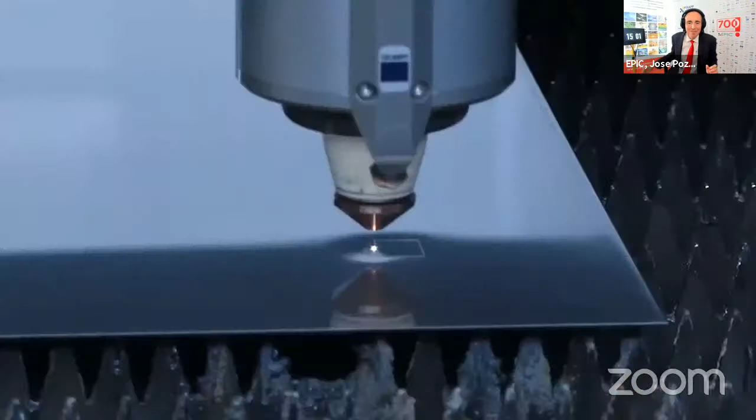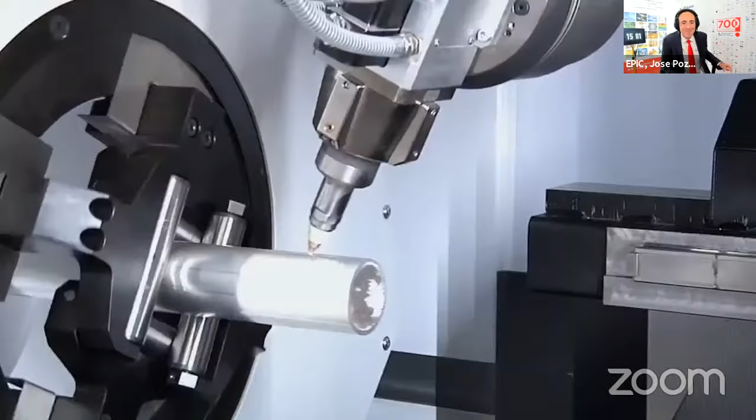Let's start with one of the biggest application fields, industrial manufacturing. Mid-infrared has already made a big impact in the laser-based industrial manufacturing world. CO2 lasers are a mature technology that is already very well established. Companies like Coherent, Prima Power, or Trumpf are very well known and trusted brands. Yet, there are still challenges related to beam shaping and beam delivering. Let's discover those needs and match them with solutions offered by the Mid-IR Alliance.

Think about input from specialty optical fiber companies like Le Verre Fluoré, CorActive, or Art Photonics, to the mid-IR optics of Iridian or LightPath, or the beam shaping capabilities of K-Labs, just to mention a few.

But what if we go beyond CO2 lasers? What makes me extremely excited is the launch of a new generation of mid-IR ultra-fast lasers, down to femtoseconds, to be used in industrial manufacturing. Look at the examples from newcomer Femtum. Why am I so excited?

Because when it comes to consumer products like the phone in your pocket, it is all about thin film patterning. It turns out that mid-IR pulse lasers are ideal for thin film patterning. That's because most conductive thin films are based on oxide materials that strongly absorb 3 micrometer wavelengths. That means mid-infrared is ideal to selectively remove these thin layers without affecting the substrate.

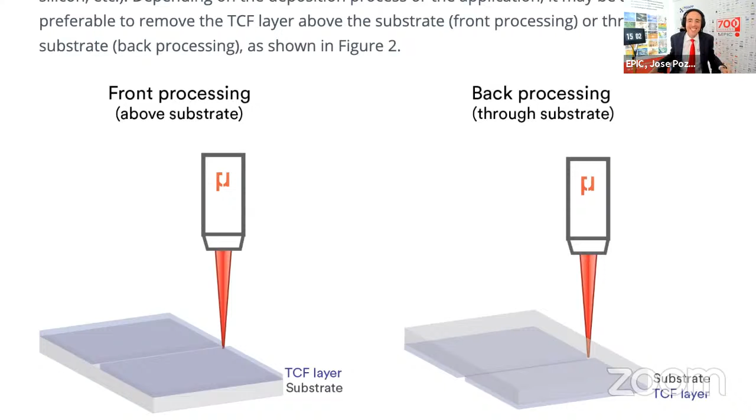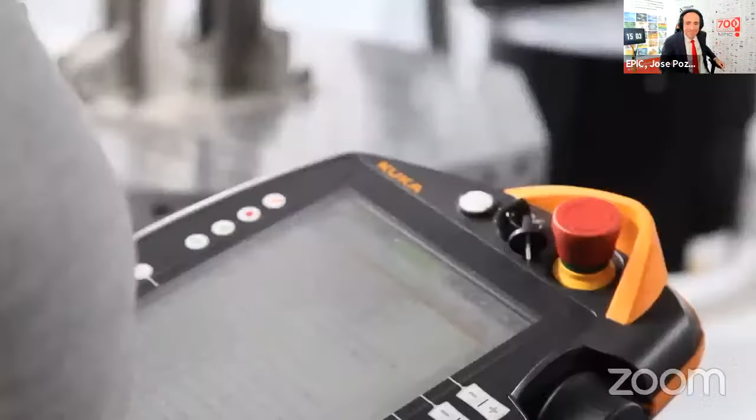But another crucial aspect in industrial manufacturing lies in real-time monitoring, because recalling a product these days can cost millions. For example, during a laser welding process, any changes to the process parameters will affect the size and properties of a welded joint. Constant monitoring is essential, and there are many ways of monitoring that with thermal cameras.

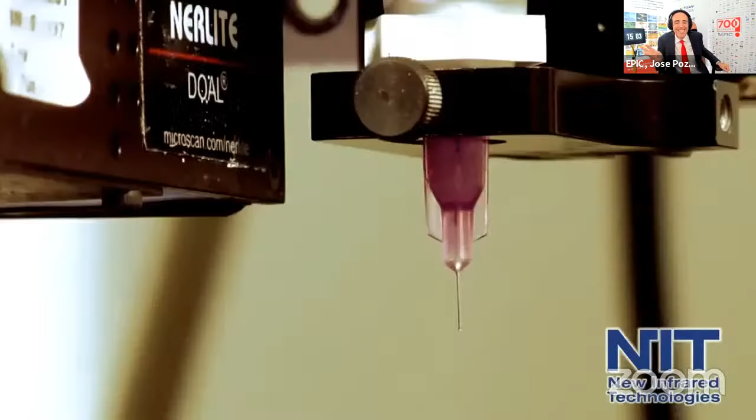What is the best wavelength range for such monitoring? Is it short wave, medium wave, or long wave infrared? The Mid-Infrared Alliance can count on top companies in this segment, like Xenics, New Imaging Technologies, HiSpecs, IRnova, or New Infrared Technologies.

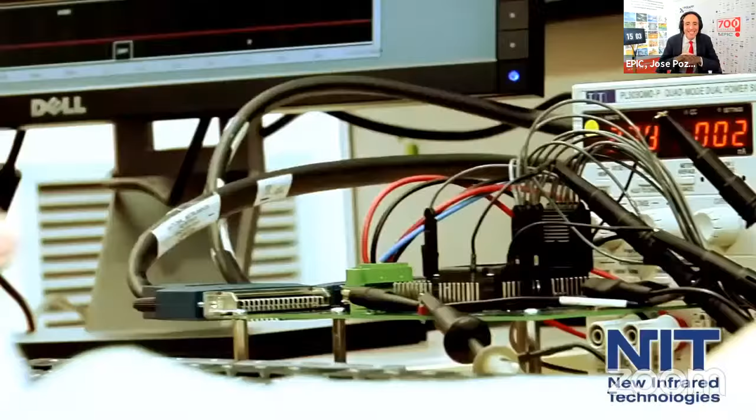And last but not least, real-time gas analysis also plays an important role for detecting unwanted vapors or even flammable compounds leaking onto the factory floor. Spectroscopy is the solution. I'm thinking of supercontinuum lasers from companies like NKT Photonics or Leukos, and quantum cascade lasers from companies like Nanoplus, Mirsense, AlpesLasers, or Quantum. If you match them with the mid-IR detectors from Vigo System, Ineria, or NLIR, you have a recipe for success.

So do you manufacture mid-IR optics, filters, lasers, detectors, or cameras? Perhaps you integrate them into industrial manufacturing systems? Or do you want an independent reality check from end users? If so, then the Mid-IR Alliance is here for you.

So if you are not on holidays on July 14th, or even if you are, take a break at 3 p.m. and join a great discussion. I promise you, it will be worth it. Magical things happen when we are tuned to the same wavelength, mid-infrared.

Indeed, magical things happen when we are tuned to mid-infrared. Thank you very much. I see we are all here, Le Verre Fluoré, Nanoplus, NLIR, NIT, HiSpecs. I tried to mention as many of you as possible in this video. If I didn't mention any of you, just tell me and I will mention you in the next one. The most important thing here is to make sure that the story is cohesive, and it is. I'm extremely excited about what is happening here.

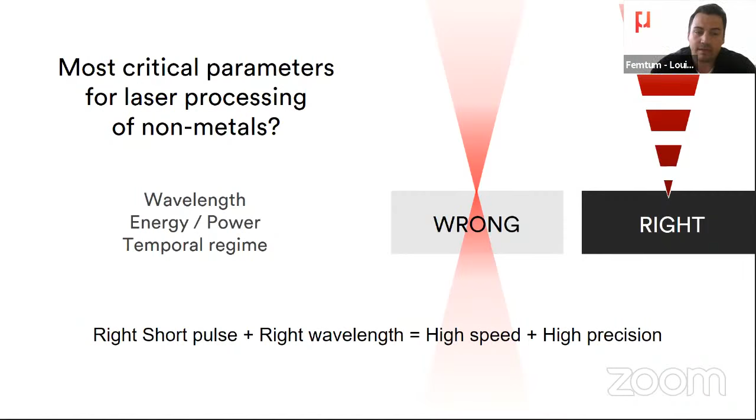Having all this in mind, if you have an application with a material and you're about to choose the right laser to do the job, first thing first, look at the material absorption band, especially if it's a transparent, organic, or delicate material, and then choose the best performance-to-cost laser that fits your application.

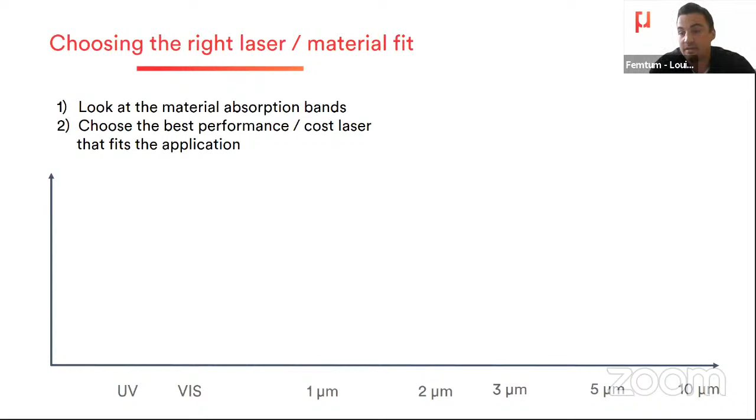I plotted 2 examples here, water and 1 polymer, high-density polyethylene (HDPE), and you clearly see that the highest absorption bands are located in the neighborhood of 3 microns in the mid-IR. That's where you find the fundamental vibrational modes of water and hydrocarbons, at 2.9 and 3.4 microns respectively. You also see that there's other types of absorption, in the UV or deeper in the mid-IR, at 5 to 10 microns.

Still, unfortunately, in the market right now, if you look at the laser industry, there are no real providers of mid-IR lasers at 3 microns emitting short pulses. Right now, the most popular laser is the ytterbium fiber laser at 1 micron. You have to use femtosecond, high energy, very expensive lasers to process those materials. So the way people try to circumvent those lasers is going by excimer lasers or parametrically converted UV lasers.

Those are complex to integrate. They are also dangerous. You can also use CO2 or CO lasers at 5 to 10 microns. The only problem with those is that they are not precise because of the wavelength, they have big spot sizes, and they only can emit long pulses or CW light. So you have all these thermal regime effects.

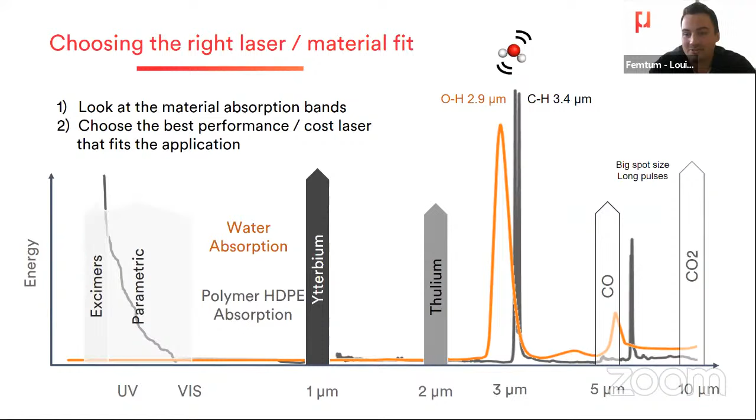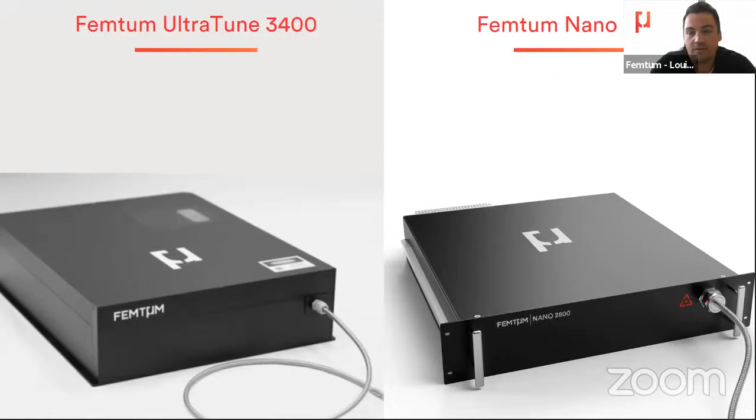So basically, there's a lack of mid-IR 3 micron sources, and that's what we bring to the market. Femtum brings the first generation of short pulse fiber laser emitting directly on those resonances. We have two products right now: the Femtum UltraTune 3400 and the Femtum Nano 2800. The first one is a tunable femtosecond fiber laser between 2.8 and 3.4 microns. It's done very easily via software, electronically.

It emits very short pulses, and because of that, you can really target the maximum peaks. For each individual polymer, you can target the maximum peaks, which is why it works with almost all polymers.

We also have a second laser, the Femtum Nano 2800. It's the 2.8 micron version emitting high energy nanosecond pulses. We have two versions: one emits high energy pulses, the other emits high power, high repetition rate. In both cases, both lasers have single mode fiber delivery, come in a 19-inch rack mount, and are air cooled. They are very easy to integrate into a machine to make your application as easy as possible.

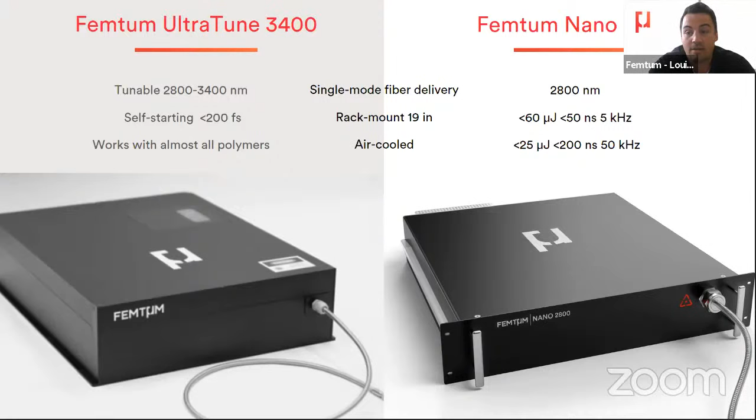So what can you do with those lasers? Basically, you can enable new capabilities in polymer processing. You can start with micro bumping, micro texturing. You can also change the refractive index of the polymer, to make light circuits at the surface, so you can inscribe waveguides. And finally, you can also ablate the material.

There's a lot of application on ablation, like marking, cutting, things like that. And in this case, for some polymers, we can decrease the damage threshold by a factor of 200x when you're at the right wavelength. So for high density polyethylene, the damage threshold is very high, but for us it's very, very low just because of the wavelength and the high absorption.

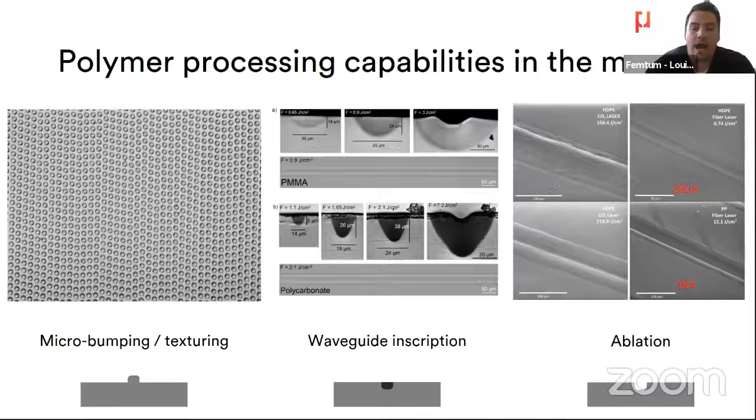Another set of applications, and thanks Jose for giving a nice talk earlier about this, we can do selective laser processing. For thin film patterning, it happens that a lot of thin films have very strong absorption bands in the mid-IR, and we can selectively ablate one layer on top of another without damaging the PET substrate, the glass substrate, or the silicon substrate. We've done gold on glass as well, so metallic thin film can be patterned too.

There's another set of applications where we try to strip polymers on metal, for wire stripping, and also polymer on glass stripping. In this case, we've developed this process, and it's pretty difficult to find the right wavelength, the right laser to do the job, because both materials are transparent in optical fibers. What we can do at Femtum is provide you the right laser to do this job very efficiently and precisely.

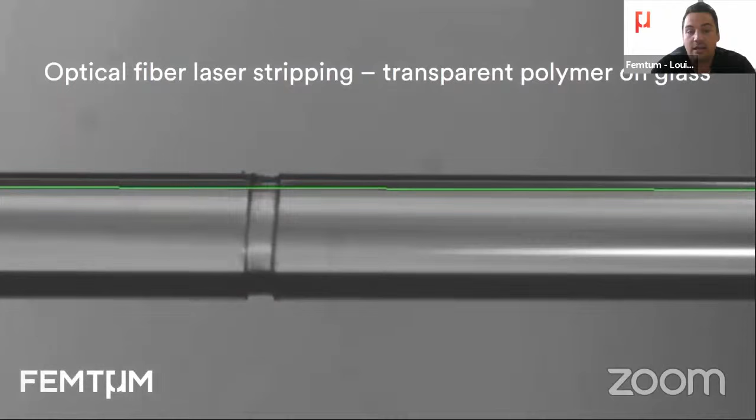To conclude, if you're limited with your processing application today, if there's something you want to do, we've equipped ourselves at Femtum with an application lab. We can pattern and try out our lasers on your samples. So what you can do is send us your sample, and we can make a demo. To do this, go to femtum.com or contact me directly via LinkedIn. It will be my pleasure to assist you. Thank you very much for your time.

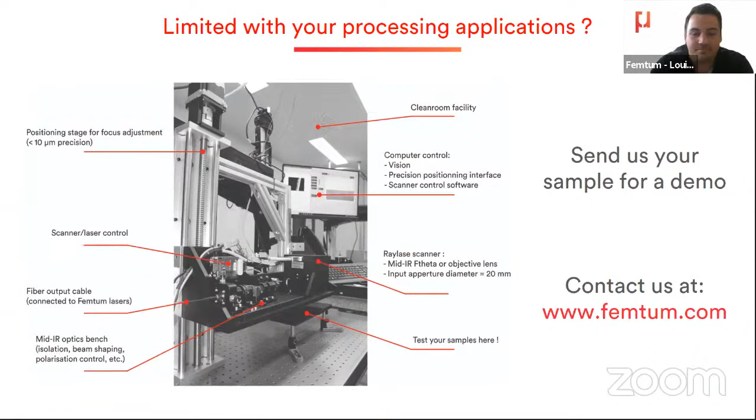Thanks a lot, Louis-Rafaël. Now there's the heavy question that you were missing, so I will ask you. I'm proud of it—sometimes people don't put it in the slide, but they say it at the end. So you didn't. What can you do for them, and what can they do for you? Do you have some challenges for all this fantastic audience? They could be integrators, they could be your supply chain, they could be towards application. What is in your mind that the mid-IR expert can help you with?

Yeah, sure. I'd say these wavelengths, generally speaking, what people can do for us, 2.8 to 3.4 micron, it's not a typical wavelength, and everything right now is quite expensive, or it's hard to produce the thin films and things like that. So new optics, like high power optics that can tolerate high power, high energy pulses at those wavelengths—this is always very good. And what we can do for people, basically, we can provide them a new generation of lasers for developing new laser processes.

Very good. So then we have here someone from the supply chain who maybe wants to talk, because otherwise, talking about fibers, of course Art Photonics comes to my mind, so Slava can tell us a bit about the monstrous expertise there. Slava, are you there?

Yeah, I just have one question. Very good, yes, if you have a question, even better. No, it's a nice question. When you do some kind of stripping of polymer from fibers or from metal, I think for any process, especially laser welding, laser ablation, or whatever else, it's good to have temperature monitoring.

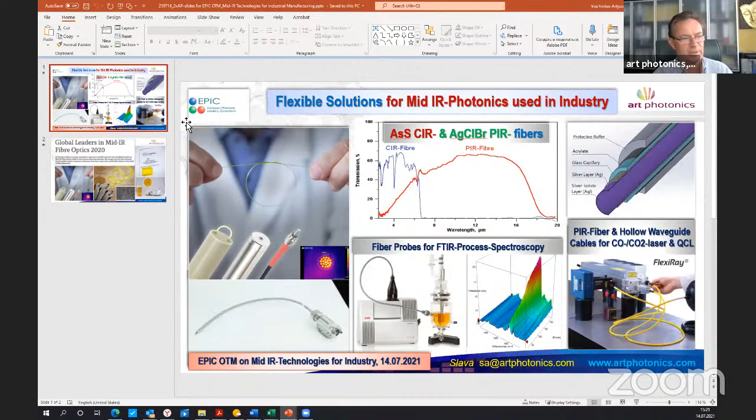But Slava, do you want to tell us a bit more about your expertise at art photonics? Maybe with one slide. Give me a chance, for one slide. Can I share my screen? Sure, you can. Go ahead. Okay. Now you see the slide? We do, yes. It's not presentation mode, but we see it very well anyway. Yeah, I can do it. Perfect. Thank you.

Okay, as I already mentioned to Louis, infrared imaging can be provided from the zone of illumination. That's why it's great to have a fiber laser which provides radiation at 2-3 microns. But flexible delivery of other lasers, CO and CO2, is also possible with hollow waveguides or other fibers we provide. This is carbon dioxide, this is carbon monoxide lasers. I want to mention this to every participant of this meeting.

Just keep in mind, any process needs control. If you do laser welding, you may need temperature monitoring, and it can be done in non-contact mode with a flexible fiber. There is flexible delivery for lasers where there are no fiber lasers yet; there are some supercontinuum, but it's kind of exotic at the moment, chalcogenide. And for processes in chemistry, industry, petrochemical, food industry, we provide a chance to control what's going on in your soup.

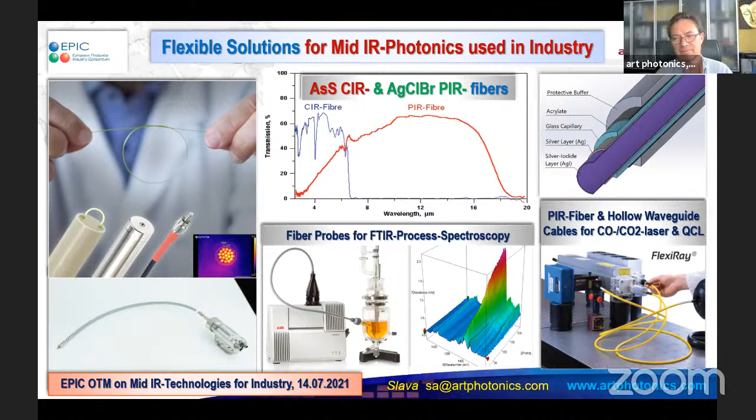One thing we had discussed offline is filters for the mid-infrared. Are there any challenges there? Any room for cooperation? Any item on your Santa Claus Christmas list in July? Yeah, filters actually. The higher the transmission and the higher the power they can tolerate, the better it is for us. There are many applications where people want to use our lasers.

Long passes, a lot of things that can be done with, let's say, filters for sure. I have a couple of companies here who I want you to cooperate with. I'm going to go first to Sweden and then back to Canada. First, I'm going to go to Sweden because there's a company here, Spectrolytic, which is one of the key companies in EPIC developing thin film-based filters.

Thank you very much, Costas, for being with us this beautiful afternoon. Costas, could you tell me a bit of what you do for mid-infrared filters that could be helpful for Femtum? I know you have one slide, and let's see if we can find some cooperation. Costas, you are muted, and I have a mug somewhere to celebrate that accomplishment.

Yes, there we are. Actually, we don't develop filters as such. We develop various spectrometer solutions, either with discrete channels or continuous spectrometer solutions. So we are largely on the other side. We are on the integration side of the spectrum, integrating components to create measurement solutions rather than filters themselves. So in terms of just filters, I don't think we'll be able to be of any particular help, but for various applications, we might be interested in integrating a laser.

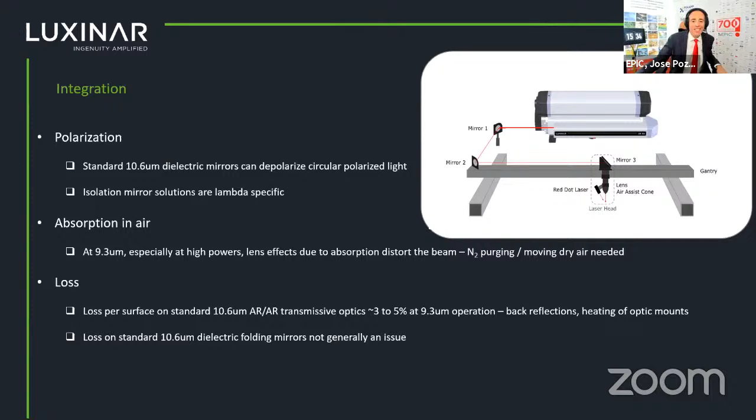You know what I'm going to do? My team is going to call you on the phone and give you a crash course on how to share the screen in Zoom. And then we'll go back to you. In the meantime, we're going to go to one of the presentations that we all were waiting for. We're going to go to Italy, because they just won a tournament in football, I heard, but we're not going to talk about football.

We're going to talk about Prima Industrie. The R&D manager of additive manufacturing, Erica Librera, is here with us to talk about their challenges on mid-infrared. This is the presentation you all have been waiting for. Erika, grazie mille for being with us. Congratulations on the tournament. The floor is yours.

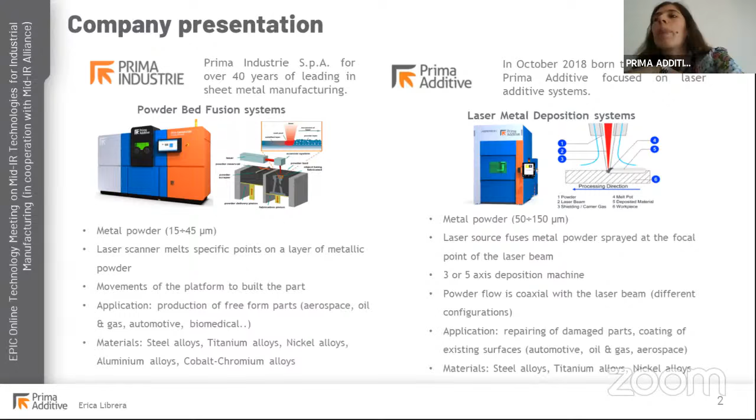The powder also has a focal point, a circular geometry. The movement of the heads and the nozzle tips allows the generation of three-dimensional geometries. This kind of approach is particularly indicated for repairing applications, recoating, repairing or remelting of pre-existing surfaces. The powder bed instead is optimal for the generation of free structures for the aeronautical sector, the biomedical sector, many different industrial applications. At the moment, we are looking at monitoring systems, an important aspect for additive technologies. It's a central point in additive.

Prima is integrating a commercial product, the CLAMIR monitoring system from NIT. It is an infrared camera that is located coaxially with the process. It is able to detect and collect the information coming from the melt pool directly from the process. It detects the dimension and the shape of the melt pool during the entire evolution of the process. The system is always able to collect the information, but also to act directly on the process because it works in closed loop control on the laser power.

This kind of system is particularly indicated for very long processes in which we have the remelting many times of the deposited layer. At the same time, it's very useful in case of critical features like corners, sharp edges, or curvatures that generate instability in the process. This is the example reported in the slide, in which an empty cube is deposited by a series of thin walls. What we can see is that without CLAMIR, the deposition is not flat, and we have a sort of overbuilding on the corners.

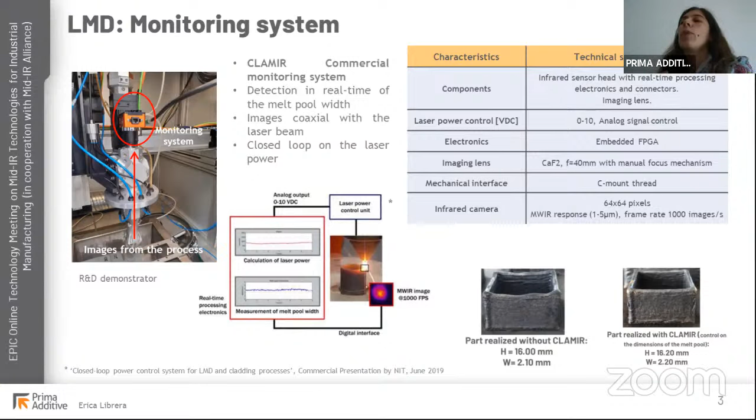The corners are a critical point because the process is changing direction and at the same time decreasing the speed. This generates a sort of instability in the melt pool. With the help of CLAMIR, we are able to correct this effect, to modulate the laser power in order to maintain the process constant and stable. And at the end, we obtain a flat geometry. But we are studying a lot around the monitoring system because we want to integrate more and also to understand more the information coming from the process.

In particular, we are looking for higher resolution cameras in order to collect more information and to be able to deposit more precise geometries and smaller features. But at the same time, we are looking for something different. For example, a visible system or camera that is able to keep the distance between the nozzle tip and the deposited part fixed. The standoff distance is a critical point in laser metal deposition technology because it generates instability in the process. One of the most common problems is the presence of underbuilding and overbuilding during the deposition, like in the case of the corners in the square.

And another important aspect is the integration of some sensors inside the process, inside the chamber, the working area, because we can in some way detect the fumes or all the products that are generated by the fusion of the metals. And probably in this way, we could be able to detect the quality of the fusion of the process during the deposition. All these applications are related to the laser metal deposition systems.

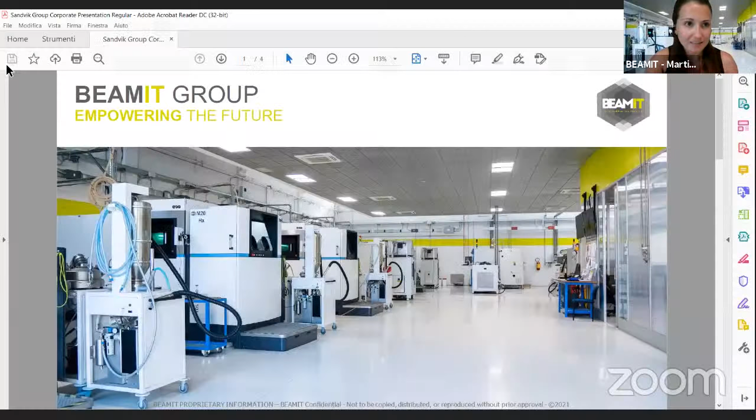Thank you, Francesca, for the introduction. Hello, everybody. I also have some slides, so I can just give you some slides. Dangerous. One slide. Sorry. No problem. Yeah, if you can share your screen, we see it. Yeah, can you see it? For me, yeah, it's there. Go ahead.

Okay. So just to introduce BEAMIT to all of you. BEAMIT is one of the solution providers for additive manufacturing. We are producing components in additive manufacturing, especially in the laser powder bed fusion process, the one that Erika just explained before. And we are producing these metal components for high demanding industries.

We believe that online monitoring is very important and very interesting for this kind of process, especially because the complex geometries and the lot sizes of additive manufacturing are not very suitable for the standard quality control plans and techniques. So that's why online monitoring can be the solution in order to achieve the quality assurance of the process.

There are a lot of literature works on thermal monitoring with the powder bed fusion process. So it is well known that it is possible to detect the process-related defects with photodiodes or visible or infrared cameras, but also mid-infrared cameras. But all these solutions are used in R&D applications, and none of them is really applicable in the industrial environment.

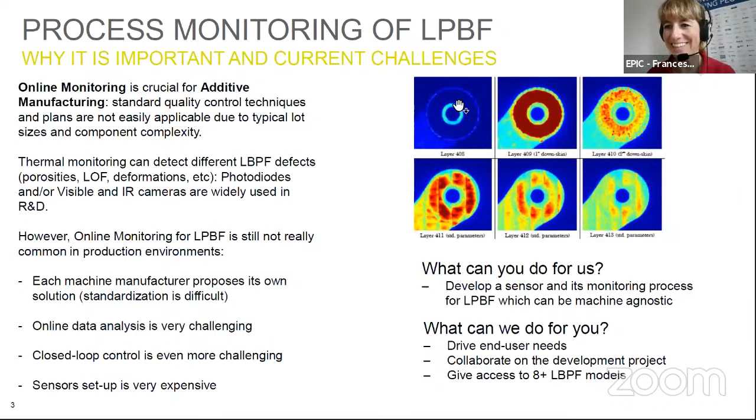Thanks a lot, Martina. That was really useful and really epic targeting. So now we have the additive manufacturing block today, with Erika and Martina. So this is your time, and I see that you are getting awake, kind of. So it's time for JJ from Vigo to ask his question to Erika. I guess she is more affected, but maybe Martina is interested as well.

Thank you very much. Erika, you mentioned that you are in need of a sensor which can detect some fumes during your processes. So what kind of fumes are these exactly, and which concentrations are we talking about? Because I understand that the place in which they need to be detected is relatively small. But what kind of fumes are these? Because I'm not an expert, I do not even know very much about additive manufacturing. So I wanted to know simply what kind of substances we are talking about here.

Okay, hi. I'm not an expert about the fume that can be generated during the process, but usually what we see during the deposition is that in some cases, due to oxidation or the presence of oxygen, we have the generation of some element that in some way worsens the quality of the deposited part. This is a possibility, this is a question, could be a solution to be able to detect this kind of fume, this kind of product due to the reaction and fusion of the metal, in order to prevent damages or the abort of the deposition job. Probably we can talk about that because we are working with different materials, especially steels, or titanium, we have the production of fumes. We can check with you, and also with my team, in order to answer correctly.

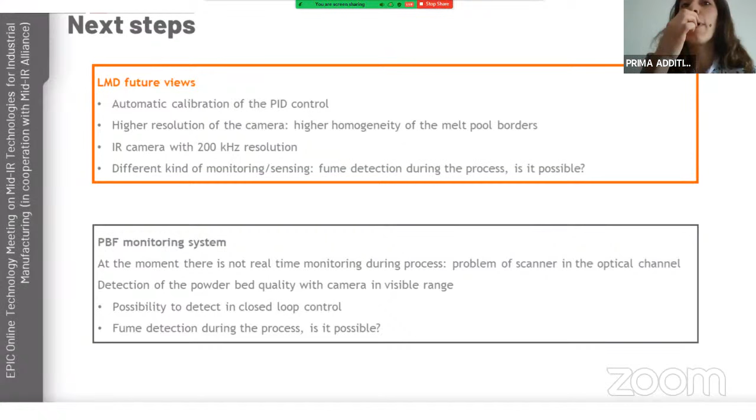No, for us it's interesting only the metals, because in both cases, with powder bed and laser metal deposition, we always work with metals. At the moment we want to see higher resolution of the borders of the melt pool, so we are looking for a higher resolution camera.

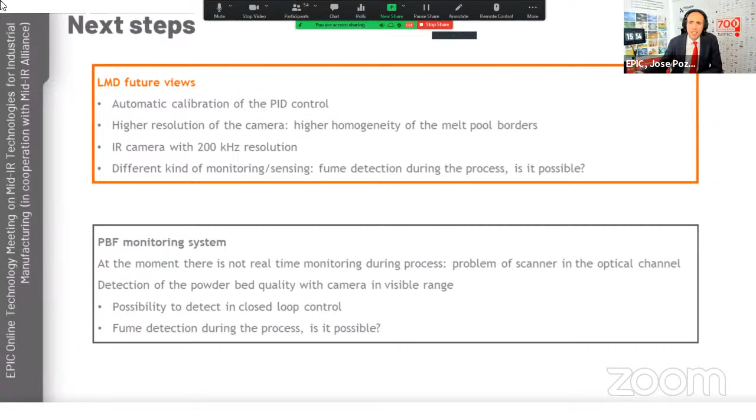What is the wavelength range that you typically use for this kind of monitoring? Are we talking about short wave, mid wave, or long wave infrared?

No, sorry, hold on the answer Erika, because there's a person in the room who has the answer. I'm gonna go all the way from Italy to Spain, to Madrid, because Rodrigo Linares from NIT is here with us.

Rodrigo, when I ask you which wavelength, you're going to tell me mid-wave infrared. I know that, that's okay, but I want you to tell us how and why. Afterwards, I want to have a discussion, because there are many people who, in my opinion, can help and also benefit from fully understanding the huge boom which is mid-wave infrared for detection monitoring. The floor is for you, Rodrigo.

Thank you very much, and welcome to everybody. Let me share my screen. Okay, I guess that now you can see my screen.

For those who don't know us, we are a Spanish company called New Infrared Technologies. We are a vertically integrated company that supplies innovative mid-infrared detectors, cameras, and industrial solutions. Our focus is to develop and offer the industry solutions for real-time process monitoring and smart control of processes. I have heard others talking before about the need for process control and real-time process monitoring, and that's where we are focused.

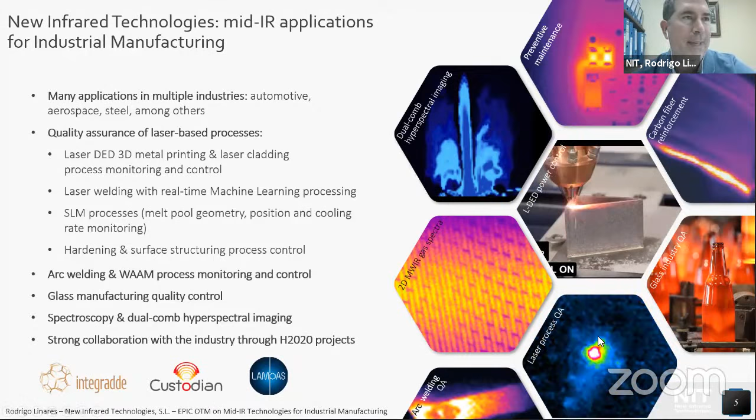So this is what we offer to industry: high-speed, real-time monitoring and control solutions, affordable solutions. What do we need from industry? I think the industry needs to move or adopt the machine vision concept, but based on infrared, not only visible but also infrared. I think that's important for process monitoring and control—for integrators or solution developers to adopt this technology to develop more control and quality solutions. That's the message I want to leave with my presentation.

Thanks a lot, Rodrigo. So this was a bit of a success story—where we can start from. We heard NIT can already provide these cameras. If someone can offer higher resolution, we will see, and we can contact Erika afterwards. The data handling is an issue for Martina too, but I'd suggest Martina talk with NIT—that's a good start. Rodrigo, I guess we have a question for you in the chat, from Lambda X—please speak up, Philippe.

Mainly it's because there is low transmission due to atmosphere absorption in this wavelength range, especially between 5.5, 6 microns and 7 microns. That's why there are no sensors there—there is no transmission of the infrared signal in those wavelength ranges, mainly due to water vapor. There are also some relevant wavelengths or spectral lines for spectroscopy in this range.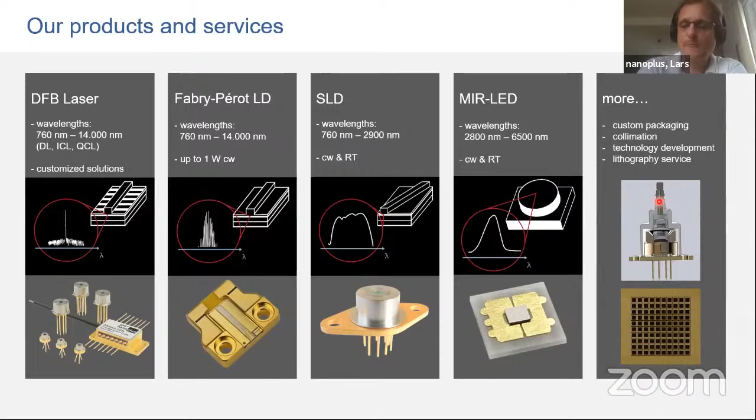Okay, so thank you very much, Lars. You are indeed one of the nicest people I know. Thank you for always constructive feedback in our meetings.

Lars, you have a semiconductor laser. You said already that one of the challenges is to do the fiber coupling in the mid-infrared. You work already with Slava on this. There are other challenges, and I believe one of the key challenges is to actually do the characterization in a system. I know Nanoplus wants to go sometimes up the value chain, so I want to find you a very nice partner. I'm going to go from Nanoplus to a company called NLIR. Pay attention to this company. It's one of the most innovative companies in mid-infrared detectors. Peter Tidemand-Lichtenberg, thank you very much for being with us. Tell us what you do, and I'm going to find you partners.

Yeah, thank you, Jose. I will show you my slide here. Just a second. I'll share my screen. And here's my slide. I presume you can see my screen now.

Yes. So here at NLIR, we do mid-infrared sensors that result in spectrometers and detectors. And we just recently launched a 130 kilohertz 2 to 5 micrometer fiber spectrometer. And what can we use this for? We use it, together with Slava, also with some probes, for inline, online monitoring. And we have also done something for conveyor belts and plastic sorting. We have also done some coating measurements inline, where people in production use it, so they can see every time they layer some stuff on there.

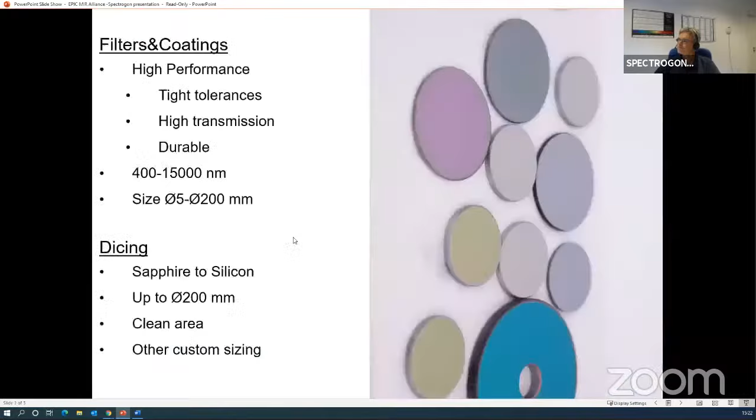Again, we do a wide range of substrates, covering those full areas. The dicing capability: I think many of the people at the meeting will know that diced filters are the way to go on tape for pick and place for high volumes. Then the wafer-level packaging, which needs lots of other skills like clean production lines, low defects, automatic inspection, ESD handling. We have all of those. 100% optical characteristic verification. So I think we cover the full range of requirements discussed in this meeting.

Thank you very much, Graham. And I'm going to now go to this that we announced already, but this time it works. We're going to go to Luxinar, and we're going to talk about CO2 lasers, which is the laser by itself in the mid-infrared. Let's go to Luxinar, understand what they do, and most important, go around the table to see how we can help them do it best. The floor goes to Gavin Markili, technology stream manager of Luxinar. The floor is yours. Thank you very much.

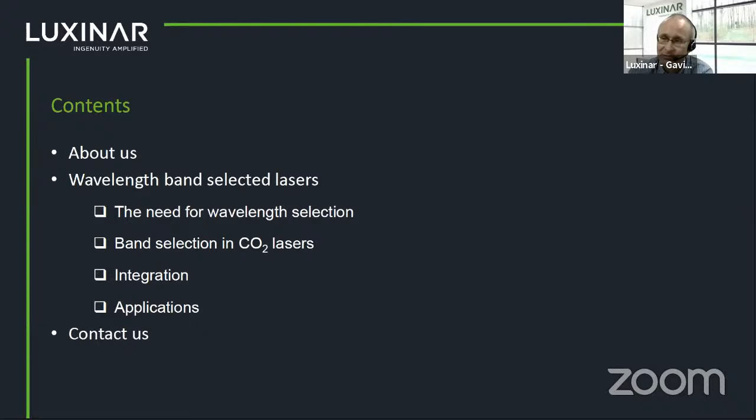Sorry about that earlier. So I'm going to talk to you today about wavelength band selected CO2 lasers. How do we do it and what are the problems? I'll start with a little bit about the company, give you a background, and then we'll go into why we need the band selection, how we do it, some integration issues that come along, and then some applications. So who are Luxinar?

We are essentially a manufacturer of industrial CO2 lasers. That's what we do. Our revenue is about 50 million euros a year. We're about 200 people, and we think of ourselves as global. We're based mainly in the UK. That's where we manufacture our lasers, but we have offices in the States, Korea, China, Italy and Germany.

So the need for wavelength selection: a simple example. This is BOPP, biaxially orientated polypropylene. You can see that this is a very thin film, and at 10.6 microns, essentially most of the light just travels straight through it. However, if you go to something like 10.25, which is doable if you know how to do it, then you can get good absorption and actually machine very thin films.

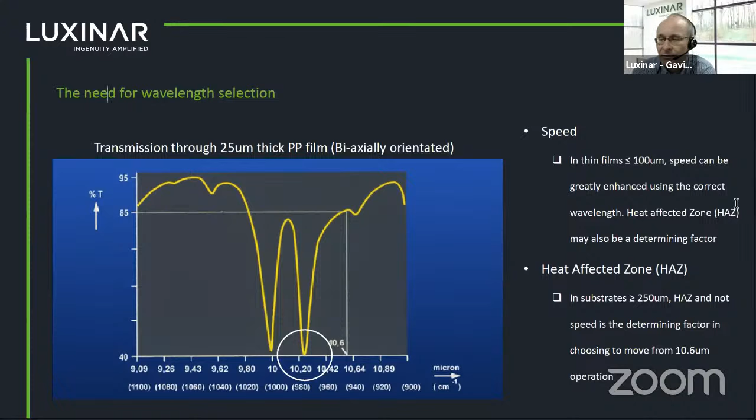In essence, in very thin films you'll find that you can go much faster, and you may well find that the heat affected zone is much better when you choose the correct wavelength. For thicker films, particularly polymers, you're really looking at the heat affected zone as being the main benefit. Okay, next slide, please.

Okay, so how do we do it? Well, there's a few options. Here you can see the spectra of the 3 different isotopes of CO2. The top one is the standard one, as you might assume. But you can make, for instance, 9.3, 9.4 microns just by choosing the second isotope down.

But really, one of the issues there is you've got the problem of the adjacent branches, and that's quite difficult to suppress. So the route that we go is through band selection, and that requires us also to suppress the next door band. We've also got issues around proximity to the RF discharge.

Our lasers are CO2 gas discharge lasers. So there's RF plasma flying around, so you've got to be quite durable to that and the high levels of UV that are generated in there. And also it's got to be quite a tough coating in itself. So really what you're finding is there are very few people or vendors that can supply us with these kind of optics that we need. And so that makes life quite difficult with regards to getting hold of them.

If it was 10.6, it'd be straightforward, but 9.3 or 10.25, it is quite difficult. So far, we've managed to manufacture up to 450 watts rated powers at 9.3 and 10.25. Next slide, please.

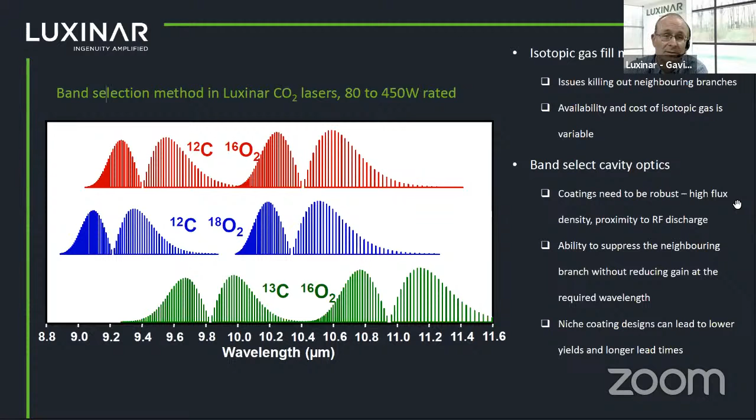Okay, so you make your laser and then you let the end user and integrator loose with it, and then you start to find there are some problems. Sometimes you'll find that polarization is an issue, and standard 10.6 dielectrics, well, they're okay, but they will depolarize your circular polarized light. If you are using 9.3 microns, for instance, it's quite pronounced.

Isolation is also difficult. So if you're then reflecting off a reflective surface, so it might be kiss cutting, etc., you might have something quite reflective underneath. You'll need to protect your laser. Protecting at 9.3 is going to be difficult because of the availability of the isolation optics. Again, very few people can make these kind of optics for you. That's been touched on earlier.

As we start to work our way down in wavelength, we start to go into the absorption areas of water. Now, it's not terrible at 9.3, but it's much more marked than it is at 10.6. And so you've got to think about enclosing that beam delivery from laser through to the workpiece. You may have to have flowing nitrogen or dry air in order to get the process, the quality that you want. Otherwise, you'll see lensing effects. Really you won't lose any power particularly, but you may see your beam getting distorted.

And finally, this loss, transmissive optics in particular, very reflective at 9.3 microns if you are trying to use standard 10.6. Now you might say, why would people do that? And the reality is that when we sell, we're not always sure who's going to pick up the laser and start using it. And often you'll find that there are problems in the field that you are asked to solve and resolve. And the realities are that it can be the most simple things that trip you up. And this is one of them.

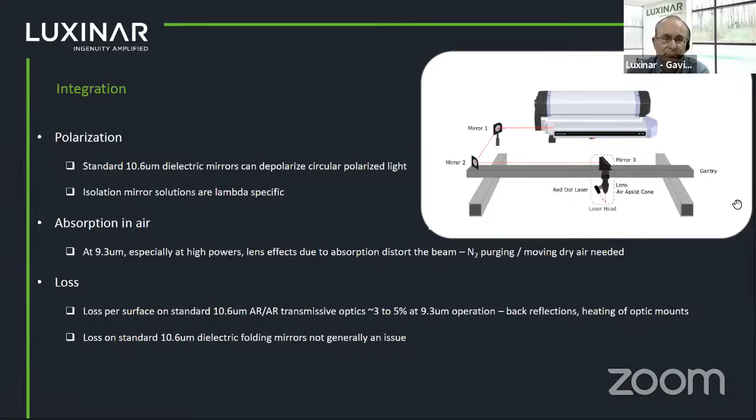People not actually understanding you need the correct AR type coatings for the wavelength that you're running. In general, though, loss of those dielectric mirrors, standard ones at 9.3 and 10.25, it's not relevant. And so it's not a problem. Okay, next slide, please. So finally, just a few applications to give you a taster.

All right, so just to summarize, certain materials can only be machined using these kind of optics, which, you know, we need those kind of wavelengths to get through them. You can buy 10.6, obviously, that's straightforward, but 10.25 and 9.3 are available up to 450 watts from us. Manufacturing characterization of band select optics, yeah, it basically requires you to collaborate with the people making these coatings. You may need to tweak the coating, work a few times on iterations to get it right.

Because not only has it got to select what you want, it's got to do it efficiently and suppress what you don't want. And you've got to be mindful of the fact that who's going to use the laser and trying to educate them, or give them the relevant information, and be mindful about the fact that it is difficult moving from 10.6 to 9.3.

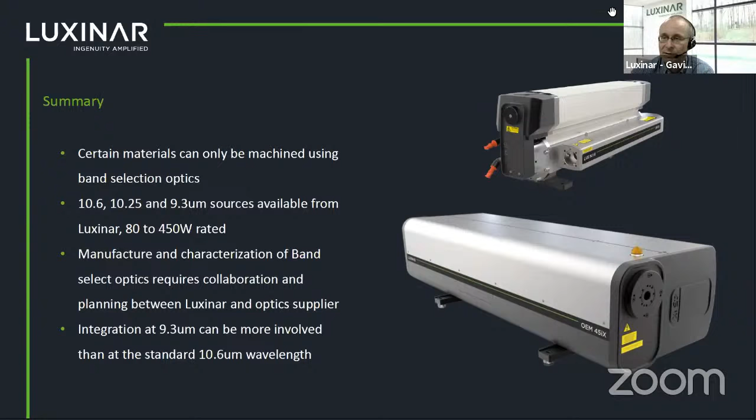It's not just simply about picking up a new laser from us and sticking it into an existing machine. And that's it. Thank you.

No, thank you. Thank you very much for bringing CO2 lasers to a mid-infrared meeting for industrial manufacturing. It cannot be more relevant here because I have many people in the room who want to help. But as I promised, I want to do this Q&A together with a friend. I'm going to bring a guest, Stratos from Gooch and Housego. Thank you very much for being with us. There is lots of room for cooperation here. Did anything resonate with you after you saw the presentation from Luxinar?

Yeah, so thanks very much, Jose. Thanks for giving me the floor. My name is Stratos. I'm the Chief Technology Officer of G&H. We are a photonics specialist. Our job is to enable new applications and enable more challenging systems. So I've been listening into all these presentations. I would say that our precision optical components line, we do flats, aspherics, cylindrical optics. We've got a range of coatings in the mid-IR going from 2 micron up to 12, 13, 14 microns.

In general, our customers are mainly into aerospace and defense, but also industrial applications for sensing and micro machining from a precision optical components side of things. But then what we do is we also use our optical components to make optical systems and imaging systems specifically. So we do use third-party cameras to do that. That's why it was very interesting to see a few of the camera manufacturers presenting their specs.

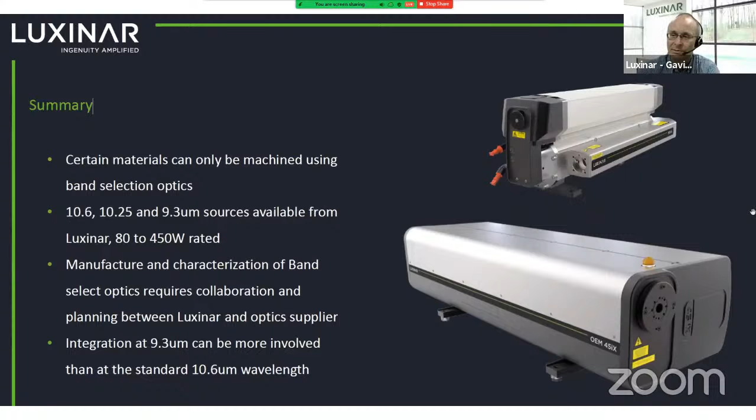Gavin, Luxinar. Yeah, definitely. It's a real challenge. Primarily, it's the length of time it takes to develop the optics and then to also qualify them. So the lasers themselves need to last 20,000 hours at least in the field. So you're going to have to live test a laser or 2 or 3 in different pulsing regimes in order to then qualify that your coating is going to survive. So yeah, it's the time, because once it's out there in the field, you can't have it fail. It's a real problem, as you might imagine.

So Stratos and all the other companies in the room, like Spectrogon, Iridian, I think there is clear room for cooperation here. I would like your coatings to be tested by Luxinar, and I'm paying for the shipping expenses of those coatings. So please make sure that there is room for cooperation here, because we want to help Luxinar, member of EPIC, to develop this. And this is a key challenge also for other companies in the laser business.

I also want to address another topic that, in my opinion, is very important. We have been talking about characterization as a challenge. In the beginning, I went to Spectrolytic. I want to go now to Nireos. I have Nireos in the room, correct? Yeah, Shang is in the room, of course, and full of energy. Shang, tell me what you do, but most important, tell me how this could be useful for the other people in the room, because we want to make sure that your spectrometers are used.

Thanks, Jose. At the moment, the spectrometers are still under development, but I would like to share my screen and show our hyperspectral cameras, which we have recently developed. So as you all know, Nireos is a spin-off company of Politecnico di Milano.

We are based in Milan, Italy, and we are a startup company. It's the second year of our business, and today I would like to present our hyperspectral camera, which we have recently launched, and it is in the wavelength from 900 to 2.3 microns.

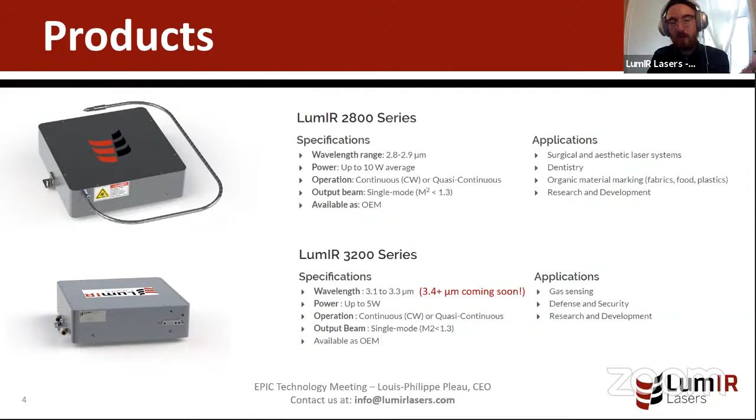But LumIR has a grand vision. We're building lasers with longer and longer wavelengths. One laser available right now goes all the way up to 3.3 micron. I know on our website it says coming soon, but the website is being remade right now, so yes, you can purchase this laser. We're even working to bring it up to 3.4 micron and above. This brings me to my next point: LumIR aims to provide fiber lasers for basically all wavelengths up to 4 micron. We want to be the first company to do that with pulsed versions for everything as well, not just CW.

One interest of going to 3.4 micron in industrial applications is that you're able to perform resonant ablation and cleaning of polyethylene. Polyethylene is one of these polymers that lacks absorption bands within the range of CO2 lasers. So if you're trying to clean something that has polyethylene on it and you don't want to damage the surface underneath, it's basically not doable right now with what's available in the market. But when you go to these mid-infrared wavelengths, you're able to vaporize it with no damage whatsoever.

This brings me to the point of the meeting, which is our problems and the partnerships we are looking for. LumIR Lasers is a manufacturer of lasers; we innovate in lasers, but we are not a manufacturer of laser systems. So if you are interested in mid-infrared and you are a system integrator working with processing of non-metals, sensing, countermeasures, surgical and aesthetic applications, get in touch with us. It helps us know exactly what the market needs in terms of new technology as we bring more things to market, and it helps you because we're able to give you an edge in your market if you're into any of these applications.

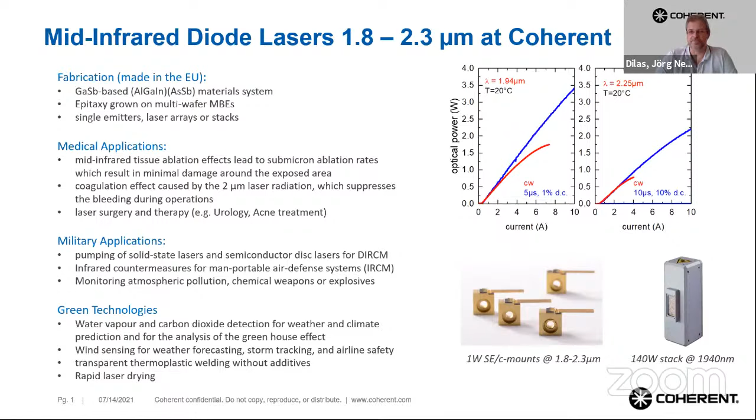Thank you very much. So next time we have to help you overcome these challenges you have, so you can also bring us towards the mid-IR, the real one, right? Very good. Eric, yeah, you have a question, right? You have your hand raised from Aranova?

Yes, I have a question for you. You said on the slide that you are doing everything in the EU, in Europe, even the epitaxial growth. Yes. Okay, you have a good partner. What do you mean with a good partner? Because you mentioned this is MBE growth, and MBE growth for gallium antimonide based superlattices, it's not heterostructure, it's not that common. It is not common, yeah, but it's all made in Europe. Okay. Congratulations.

Congratulations to all of you. It was the first online technology meeting on the Mid-Infrared Alliance, and we really did bring some of the key companies in the sector. I'm extremely happy that we addressed some challenges on filters, monitoring, fiber and CO2 lasers, and adaptive optics. But the most important part of the meeting is now, when you actually have to follow up with each other. I want everyone now to find the 3-4 companies they could actually do business with and interact with. That is going to happen now. But first, let me tell you something quite important.